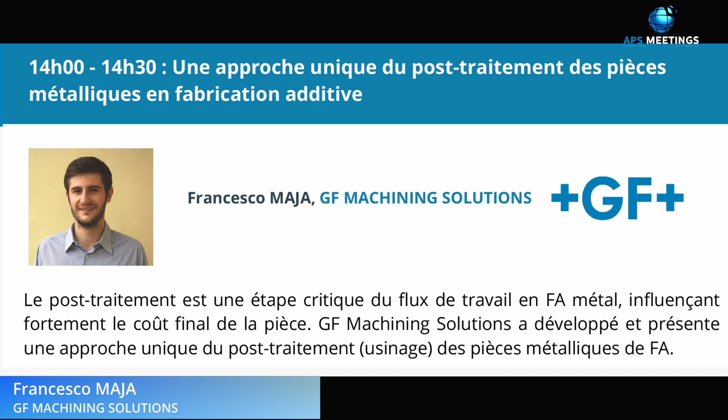My name is Francesco Maja, and I work for GF Machining Solutions, where I'm responsible for engineering within the additive manufacturing division. Now, as a very fast introduction, what is GF and what we do.

It's a corporate with proudly over 200 years of history. We're actually split into three divisions: piping systems is the oldest one, then casting solutions, and finally machining solutions, only 100 years old.

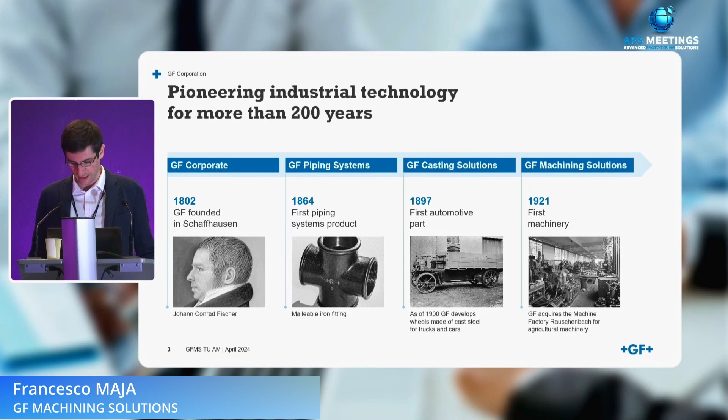We span across solutions for fluid transportation with piping systems. We cover a lot of cast products with casting solutions, and finally with machining solutions we care about developing technologies that we offer to the market in the state of machinery.

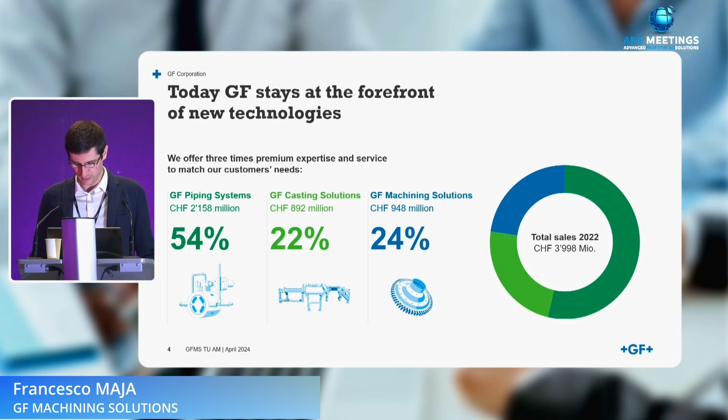Overall, it's a company with around 4 billion turnover, as you see here with figures from 2022, and over 15,000 employees worldwide. I forgot to say, but we're proud of that: it's a company established and still very headquartered in Switzerland, with all R&D activities as well as production.

Pertaining to GF Machining Solutions, we are traditionally a world leader in conventional manufacturing, milling, and electro-discharge machining specifically. Through the years, we have expanded our portfolio into laser machinery as well, with laser texturing, structuring, and engraving machinery, and since 2018, additive manufacturing.

Now, I believe that the history of our company is important for you to understand what we're going to present today. Additive manufacturing for us is a complementary technology to conventional manufacturing in order to achieve a final part. We all know that additive, in the majority of cases, doesn't give you a final part—it gives you a raw part.

Therefore, the company decided to invest in additive manufacturing as a complementary technology that enables complex shaping, the possibility to handle complex and tough materials, at the same time completing what is done finishing on a conventional manufacturing machine.

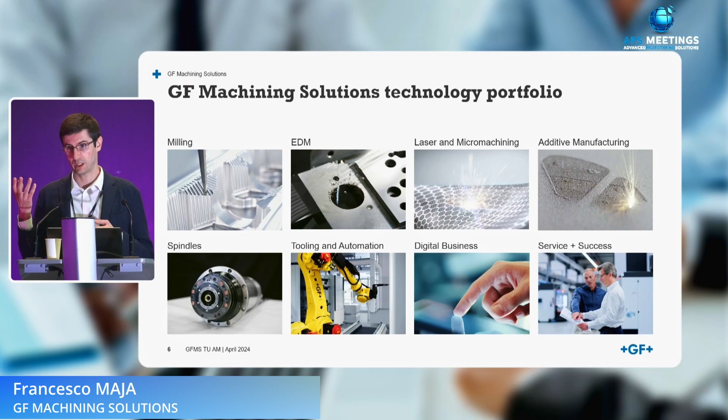And this is what we mean by a full workflow that leads you to a final part that is according to drawing.

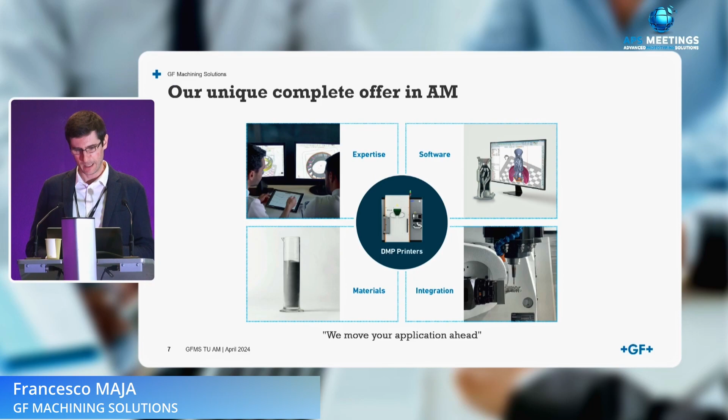Where everything scales up, the complexity of handling that part, and therefore finishing it, becomes more and more relevant, along with the challenges that come together with it.

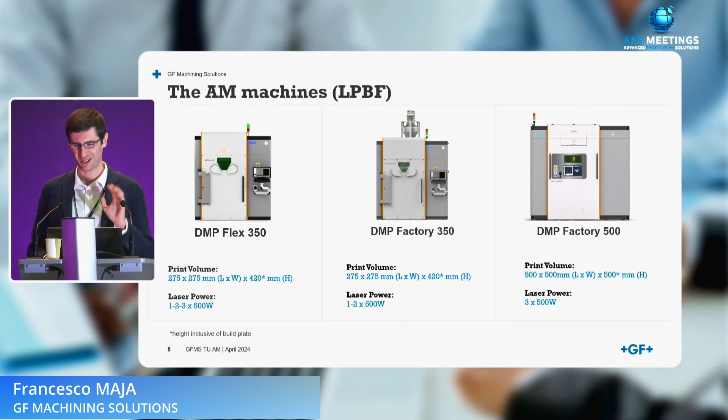One last word on this small introduction: as part of the GF Group, there's also what we call the casting solutions additive manufacturing center. It's actually a factory where, together with them—a sister company—we established a park of machines that offer third-party manufacturing to the market.

So I believe it's a unique offering where you have a company capable of offering you either machinery or parts on demand, depending on your requirement. That also makes a big difference in developing and growing the technology together, as you not only develop machines, but also develop the technology on real end-user applications.

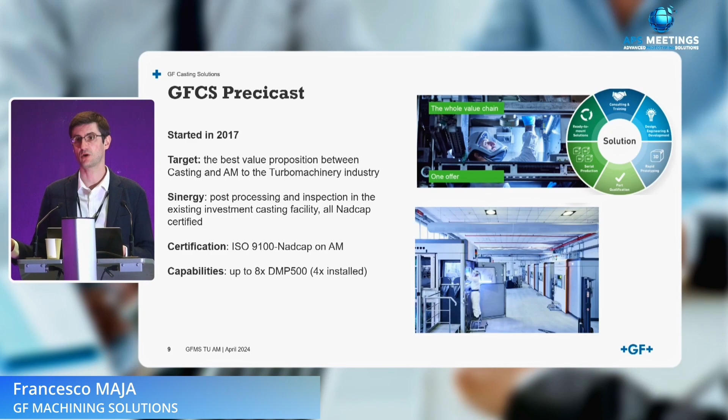Now, on the post-processing of metal parts, which is really the core of today's presentation, here's a breakdown of what our customers give us as feedback—really the end user voice. What is the cost breakdown of a metal part done by additive?

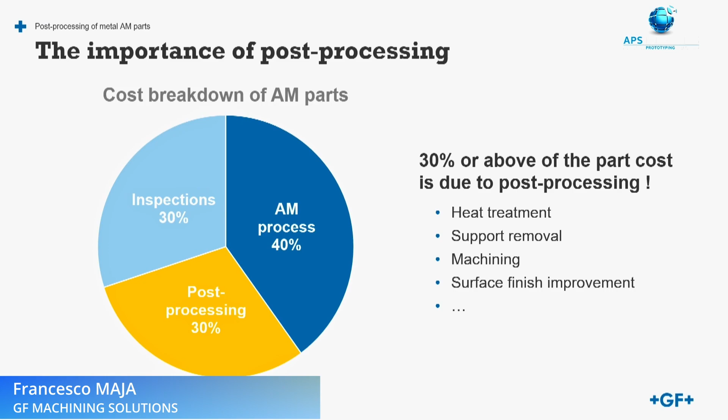Roughly it's 40% the process itself. This is, as you know, machine, powder, and operator time, labor, facility—all that pertains to printing itself, in very simple words.

But then, as you get a part out of the machine, there is another 60% of costs that pile up and contribute to the cost per part of the final geometry that you intend to put in use.

30% is post-processing, and by post-processing we mean heat treatment, that we know is always there, moving from a simple stress relief into more complex heat treatment cycles like solution annealing and aging, like T6 for aluminums, etc. Hot isostatic pressing even, very lengthy and expensive.

And then you have everything that pertains to support removal, machining, surface finish improvement. All of this is what we generally broadly call post-processing.

And then you have final inspections that, depending on the criticality of the part, may also weigh a lot. If you think about X-ray, liquid penetrant, ultrasonic inspections, even CT scans in some cases.

So as we talk about an expensive technology and users would like their parts to be less and less costly, the point of view of GF is, yes, we're working on more productive machines. We're working on lowering the cost of raw material, increasing the automation so that you have a less expensive process, or a lower cost per part at the printing side.

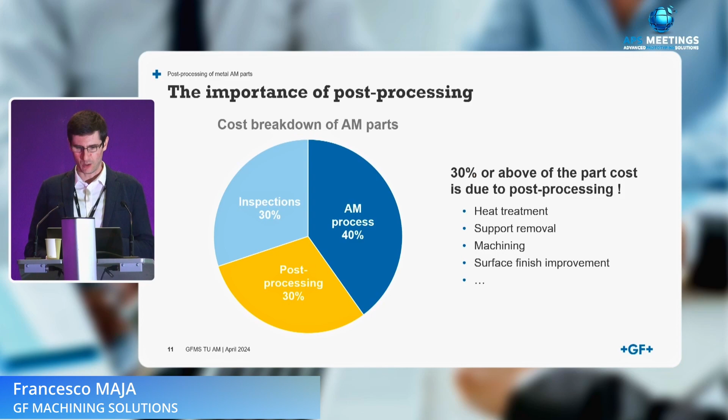But let us not forget about the other 60% of the story, which actually heavily contributes to the cost of a part. Now on the inspection costs, there we would need a full day of presentation alone.

But just as a brief mention, we are actually working on an innovative method to have in situ monitoring of your print quality directly on the part inside the additive machine.

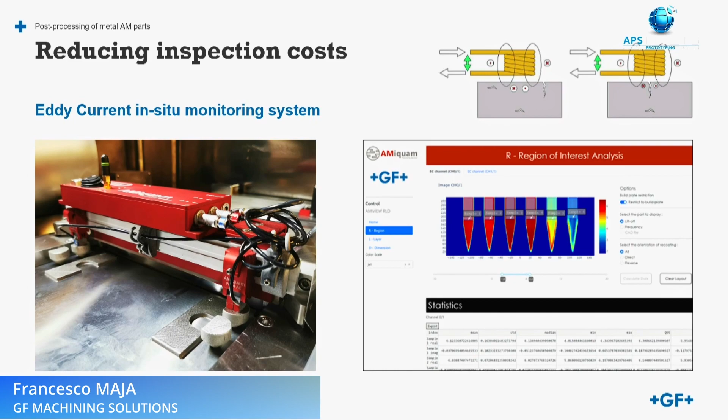Of course, it's a long way together with the end users to bring it up to where we want it to be, meaning a qualified method that anybody accepts to directly check and quality ensure the part inside the machine, so that CT scan can be avoided.

That's the dream. That's where everybody wants to be, and we're confident we will get there. This is already, I think, well advanced, and for sure different from what is currently out there as a commercial offering.

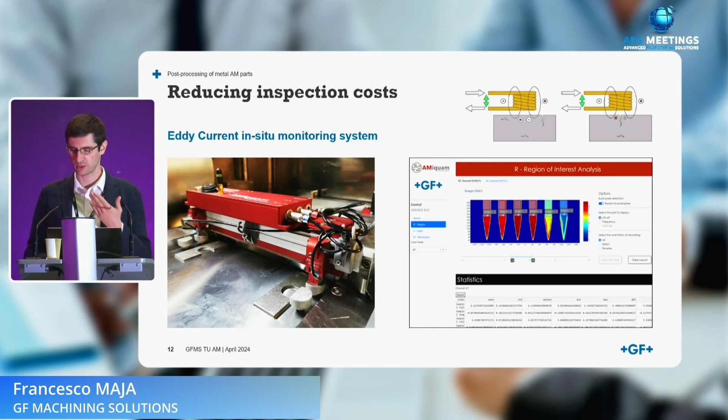Based on eddy current, which is a well-established technology for conventional parts, we're porting it into the additive machine. So for those that are interested, definitely let's have a chat offline.

Of course, budget is a topic there as well, but also lead time. We want to have the cheapest part possible that is compliant at the lowest cost possible. And when it comes to these complex shapes, where the final drawing requires tight tolerances and good surface finishes on some areas, the question is: what is the optimal workflow to achieve that?

Why? Because there's a lot of dedicated tooling and a lot of referencing operations on the milling machine that take up time, and therefore they take up costs.

What we did here was conceive the workflow in a way that you could directly machine the part as it was still attached to its substrate, with this substrate designed in a way that it could preserve the referencing points as you moved from the additive to the milling machine.

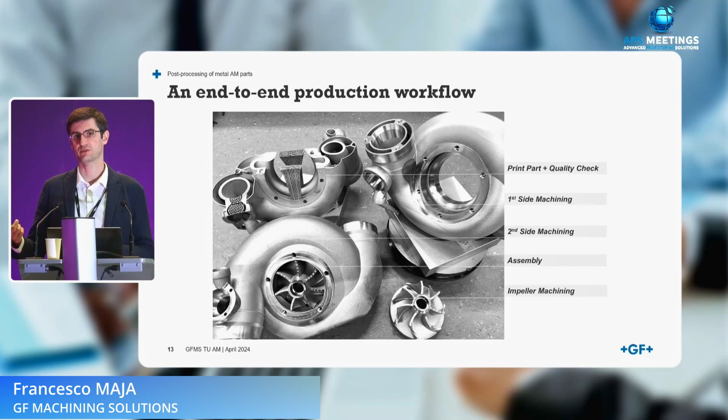And what you see here is the full workflow as we went from the CAD of the part to the final part in tolerance across different technologies. So on the bottom side you have a hardware flow with different machines involved - mostly additive, milling, and then EDM for cutting. So at least three technologies involved.

And then on the top side, you have a software workflow where, of course, you like to have the CAD of your part streamlined from the very first to the very end step, so that you don't have to import and export and re-reference your geometry again.

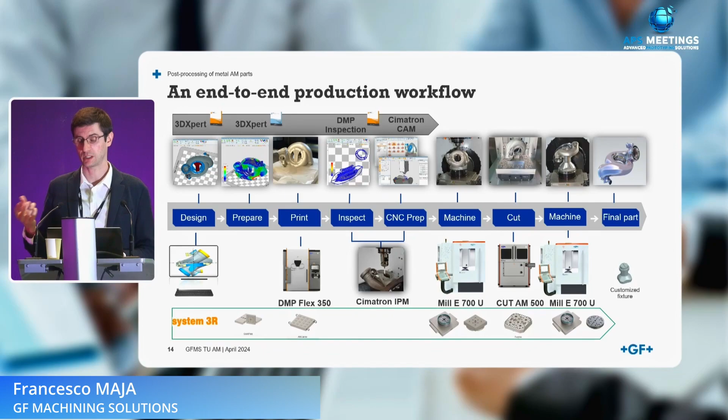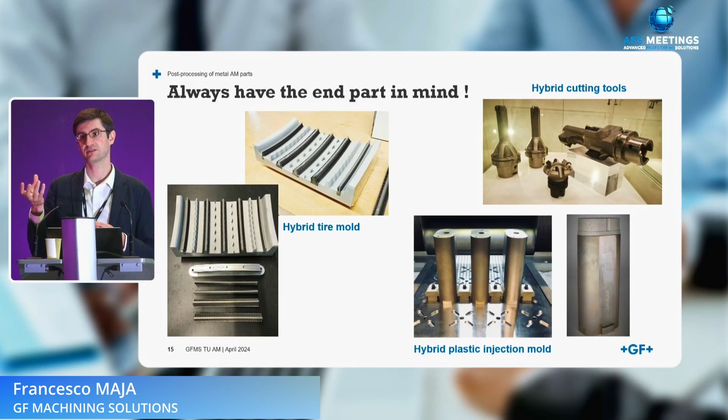Some hybrid cutting tool where again the topic was having a conventional substrate, which is the standard interface with the milling machine, HSK for instance, and the additive part of the component, which is the tool itself that bears the cutting inserts.

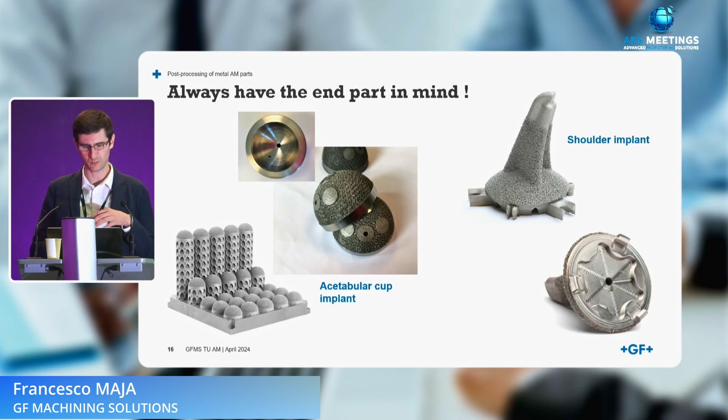I keep going. This is hip cups on the left, acetabular cups. Printing them flat is relatively easy and also state-of-the-art. The question is to go in volume and automatize the machining.

We ran a case study with this customer where we could actually print them in stacks and then feed them to an automatic Swiss type lathing machine, turning machine, where you have the bar that is automatically feeding each part to the cutting insert that takes care of machining the inside and then cutting away the external surface, which is what is keeping together the parts.

And then a shoulder implant that is as-built on the outside where we want it to be rough, and we also like to have a lattice on it, but on the bottom side, which is actually the side facing the build plate where we start printing, that's where we require machining.

So the concept here was designing the supports in a way that they acted as a clamping fixture as we go into the milling machine.

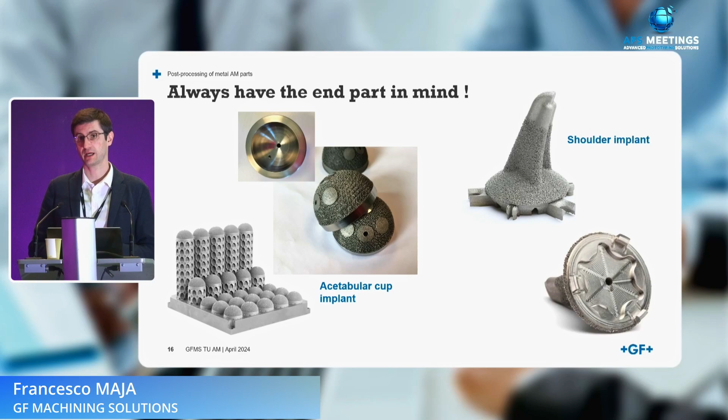So these are just a few examples of how you can conceive the final part since the very beginning of your engineering workflow, and try to really squish your mind, of course, having some knowledge with you in order to conceive the best solution for each individual case study. If there is volume behind it, then also automation may come into play instead of just manual labor, for instance, in loading the milling machine.

Now, what I want to present a bit more in depth today is this case study, because I believe it's very relevant on the line of what I was just introducing here. Case study, actual case study, so reality.

A customer came to us with the need, saying, look, I'm a medical device manufacturer. I produce, in this case specifically, spinal cages, which is a very common part, ongoing in production with additive. There's a lot of geometries, he named over 1,000 different ones, but there are commonalities among all of these, which are those I listed: a conical nose, the bottom has to be smooth, and there's always a lattice.

That's why we go additive with this part, that is what favors retention with the bone. And then there is on the other side an end, that is where we connect the surgeon tool. So different shapes, very different from each other, but some key features that are common.

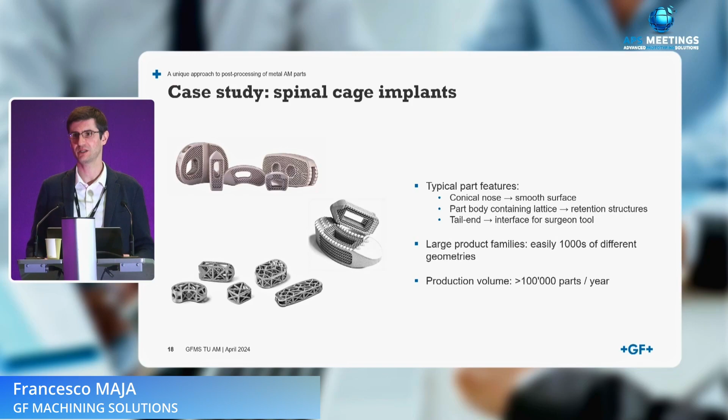And the question is, can I have something that replaces my traditional workflow, which is what you see here. As of today, and we're talking about, maybe I missed this information, but it's quite important, over 100,000 parts a year of production volume. So this is really production, it's not prototyping, it's not testing, it's production.

His problem is the traditional workflow that he has at the moment, that he used to have: printing on supports meant for manual removal, and then finishing parts each one by one manually via a grinding tool. What does this mean? First of all, you have a topic of consistency and tolerancing as a challenge on your part. Secondly, scrap rate, which he estimated between 2 and 5%, really due to a mistake, not on the additive machine, but a manual mistake that you may have.

Some parts are out of tolerance; they need to be scrapped, and then it's impossible to automatize. No, it's really manual, labor intensive.

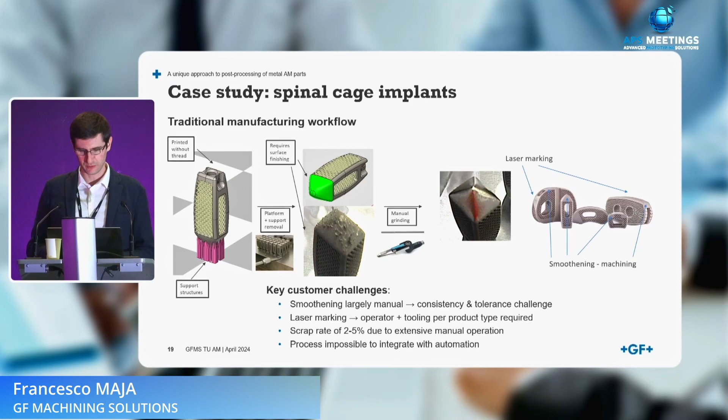What we developed out of different concepts was a clamping solution that enables the parts, as they are printed, to go directly into a milling machine with a unique clamping.

The principle is the following: any part, however you choose your orientation, it needs supports. Why don't we use such a support and design it in a way that you can use that support as a clamping reference on any other subsequent machine.

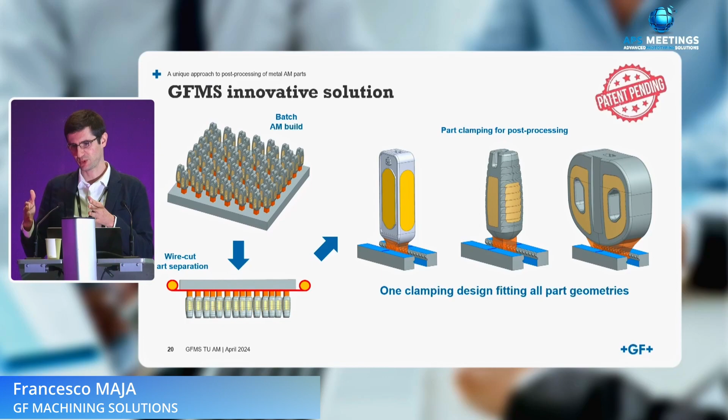We thought about different designs, and finally we came to this one that is transversal to, let me say, a majority of parts. So what we show here is a spinal implant, but imagine any part that you print and then cut, that you machine - this is applicable. We also applied for a patent on that, much broader than just spinals.

The detail is the following: you have the support made solid enough so that you have stiffness there and some mechanical robustness. We apply these inserts that on the support are shaped as valleys. On the clamping jaw, they're shaped as peaks, and as they meet together, they provide uniquely, in the very moment you tighten the jaw, both referencing - height, XY coordinate, and rotation angle - plus the stiffness and tightness that you need as you clamp a part that will be in touch with a milling tool.

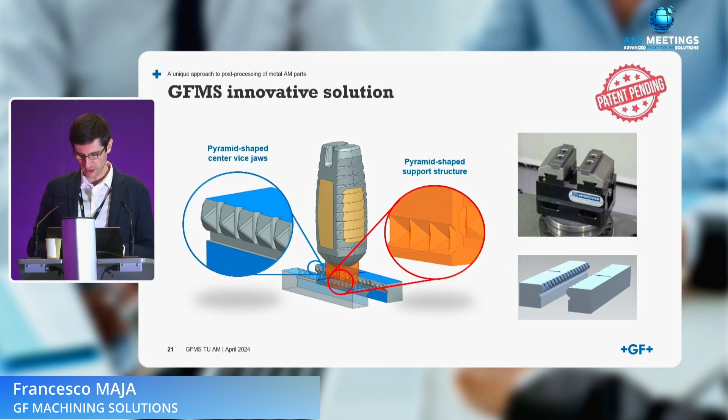What is the advantage? First of all, the design is easy and straightforward, so the supports are fully printable, no extra complexity. We don't affect the additive time, because anyway we would have needed those supports. We actually do the function well of clamping the part, so holding effectiveness is there. It's error-free, and it's also possible to reference correctly each part in a fully automatized workflow.

You don't have any part-specific tooling that comes with this shape, and therefore out of all of this list of advantages it's clear the cycle time is lower, and therefore the part cost. You gain in quality, meaning you lower the scrap rate because you just mill away instead of grinding, and it's fully ready for automation.

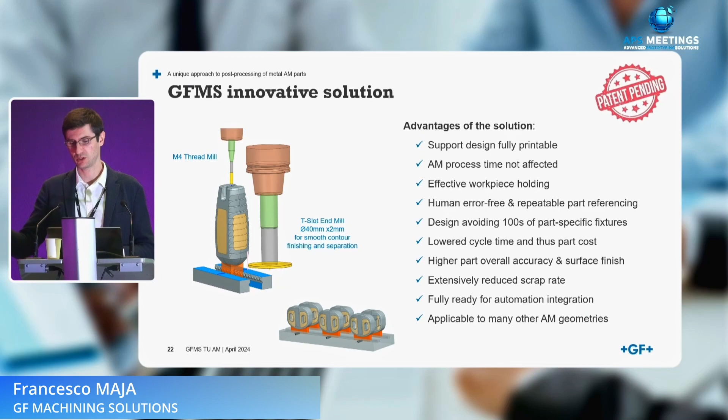So from the day you like to have, instead of clamping one part, you put more, or you want to put a small robot that handles the part instead of a human - it's fully ready for that. So here are a few examples, because not only did we conceive it at CAD level, but of course we had to prove it.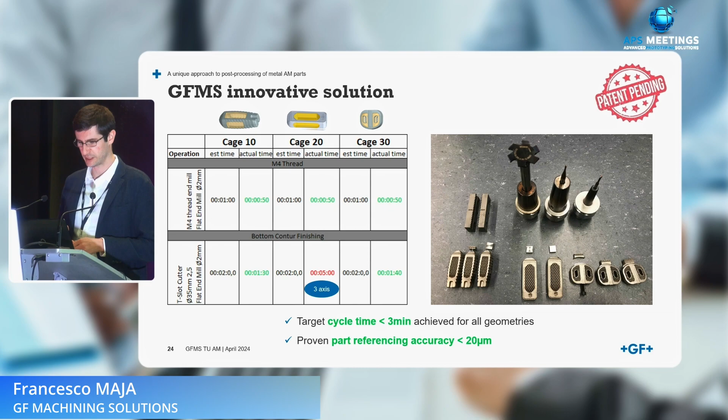That's what the customer requested, which is the average time it takes manually. Only on one case, cage 20, the middle one, we were at 5 minutes of machining time, but in 3 axes. With 5 axes, it can go below 3 minutes as well, with a proven reference accuracy of this clamping solution below 20 micron, which is definitely compatible with what a milling machine requires in terms of position accuracy on this kind of geometry.

So with this, I will wrap up. The principle is a bit broader than just the case I presented, but I hope I was able to deliver this key message. Post-processing, as we speak and as we collect feedback from market, is heavily impacting the unit part cost. So let's talk about how to make the process cheaper, but let's also talk about how to make whatever is beyond that cheaper, so that we actually grow more applications in a sustainable way.

We as GF are experts in conventional machining, and we chose to integrate additive because we strongly believe the two go together, and only by conceiving the workflow and the end part since the very beginning can you have successful applications where we can actually talk about volumes in a sustainable way - with all the advantages that additive brings, so lattices, complex features, all that we know. That was it. Thank you.